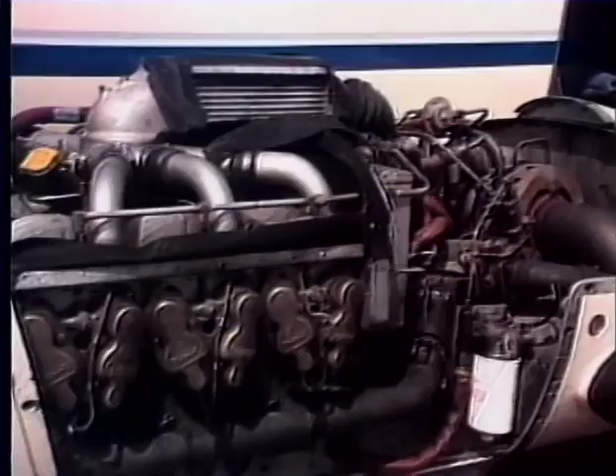What you and I will talk about is the theory and construction of aircraft engines. We're going to lead off by talking about reciprocating engines, you know, these with pistons that fly all around and shake and rattle. We'll get into turbines later on.

All right, let's talk about the 5 events in a 4-stroke cycle engine. Now wait a minute, what in Sam Hill is a 4-stroke cycle engine? It's just a 4-cycle engine. That's the FAA's fancy terminology for a 4-cycle engine, they call it a 4-stroke cycle engine. And yes, you heard me right, I said, what are the 5 events in a 4-stroke cycle engine?

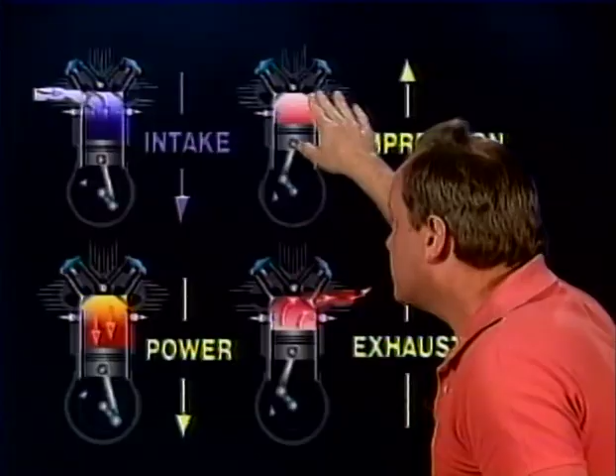Well, here's the way the FAA does it. We all know how an engine works. The intake valve opens, the piston goes down, it sucks in the fuel-air mixture, and that's called the intake stroke. Then both valves close, the piston goes back up and squeezes the fuel-air mixture. That's called the compression stroke.

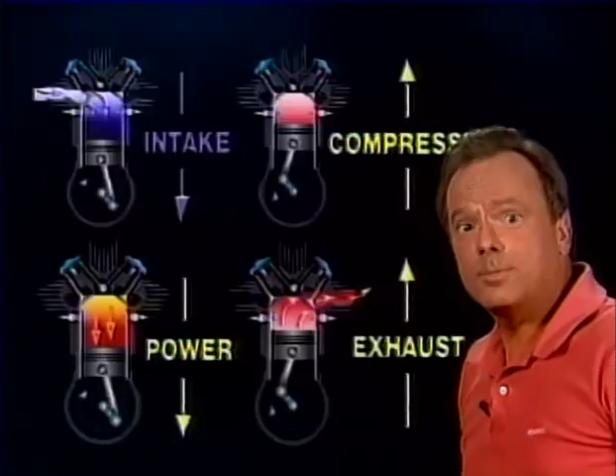And here's the 5th event: the spark plug fires, you have ignition. And with both valves closed, the fuel-air mixture burns and expands, shoving the piston back down, and that's called the power stroke. Then the exhaust valve opens, the piston goes up and shoves the exhaust out the exhaust system, and that's called the exhaust stroke. So the 5 events in a 4-stroke cycle engine are intake, compression, ignition, power, and exhaust.

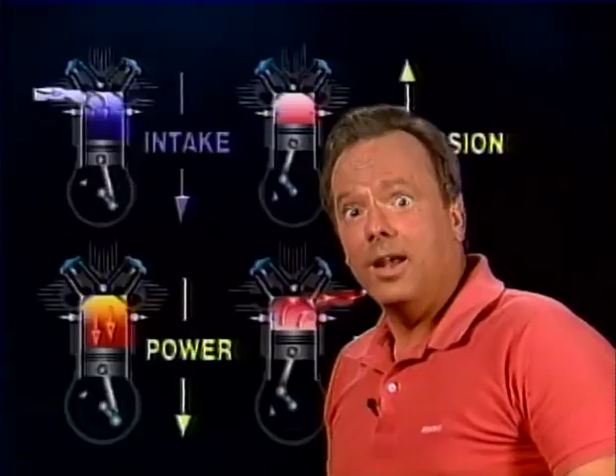Now, I said that in class one time, and some guy said to me, 'Hold it, wait a minute, that's way too doggone complicated.' I said, complicated? What are you talking about? What's so complicated? All I said is, any internal combustion engine is simply a matter of intake, compression, ignition, power, and exhaust. This is way too complicated.

All right, what's less complicated, I said. He says, well, everybody ought to know, especially you ought to know: any internal combustion engine is simply a matter of suck, squeeze, fire, bang, and blow. All right, you can make out of that whatever you want. That is not official FAA terminology, but it does help me to remember it. As far as the FAA is concerned, any internal combustion engine is simply a matter of intake, compression, fire or ignition, power, and exhaust.

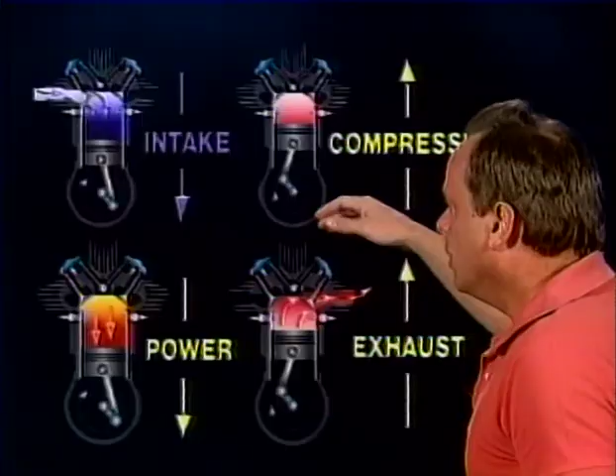Now, they'll ask you some questions about a 4-stroke cycle engine. They're going to say, on the compression stroke, would the intake valve be open or closed? Well, if you expect to get any compression at all, it's got to be closed. So the intake valve closes on the compression stroke.

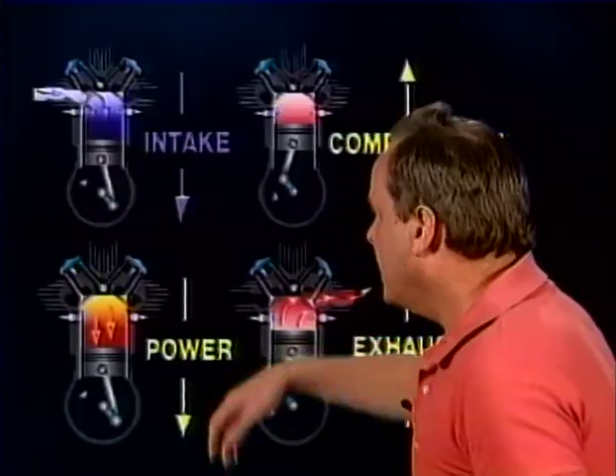And they're going to say, all right, let's assume the exhaust valve of a 4-stroke cycle engine is closed, and the intake valve is just closing. What stroke are you on? Well, once again, if both valves are closed, that's the compression stroke, because the intake valve is just closing, and it does that on the compression stroke.

Now, here's a couple of concepts that are really going to be useful to you in understanding some questions later on for the written exam. These 2 concepts, you probably already know them, are top dead center and bottom dead center. They're going to be helpful in determining valve overlap and setting timing, and answering questions on a test more than anything else. All right, let's take a look at it.

Top dead center is when the piston has gone on its upward path, stops, and reverses itself and starts back down again. Top dead center is when the piston reverses itself right there, and by the way, it's also when the piston is furthest away from the crankshaft. What's bottom dead center? Well, it's when the piston is going down, gets to the bottom of its stroke, and then reverses itself. At that point, the piston is as close to the crankshaft as it's going to be. That is top dead center and bottom dead center.

We're going to talk about those concepts later on. Now, another concept we want to talk about is valve overlap. When I explained intake, compression, power, and exhaust, I implied that these valves open and close at top dead center and bottom dead center, but they don't. In order to help the engine breathe a little better, scavenge the exhaust out of the engine and so on, these valves open slightly off the top and bottom dead center. For instance, let's take a look at it.

First of all, at the end of the exhaust stroke, very often you'll find that when the piston is going back up on the exhaust stroke, the intake valve will open 15 degrees before top center. The reason for that is, as the new intake, the fuel-air mixture, comes into the engine, it helps shove out the burnt mixture out the exhaust system.

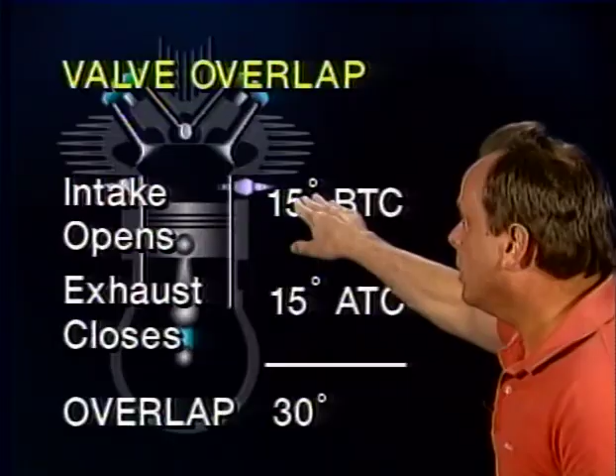So the intake valve actually opens at the end of the exhaust stroke, 15 degrees before top dead center. Both valves are open for that 15 degrees, and then the exhaust valve stays open until the piston starts back down 15 degrees after top dead center, because you're still having some of the intake come in and shove the exhaust back out. So there's actually 30 degrees of valve overlap, as you finish the exhaust stroke and start the intake stroke. During that time, both valves are open for 30 degrees, and that's called valve overlap.

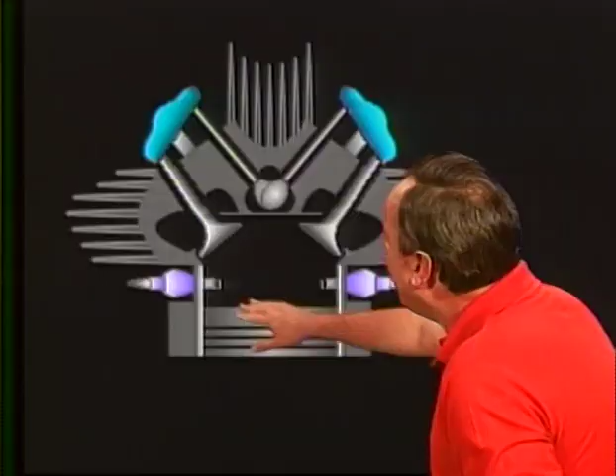Now, they're going to ask you a question about this on the test, and the question is: why do you have this valve overlap? Why do you have two valves open at the same time? And what is the importance of proper valve timing? Why is that so important? There are actually two reasons you have valve overlap, and two reasons proper valve timing is so important.

These two reasons are that they help obtain best volumetric efficiency. You might say, well, what is volumetric efficiency? That's the ratio of the charge you're putting into the cylinder to the displacement of the cylinder. If you're getting a lot of charge in the cylinder, you have very good volumetric efficiency. The other reason proper valve timing and overlap is important is that you get lower cylinder operating temperatures.

Now, these are the correct answers to this question on the test. They also give you a couple of false answers that don't quite make sense. They're actually correct statements, but they're not complete answers.

For instance, one false answer they give you is that you want to achieve the best possible fuel-air charge, and that's the reason you have proper valve timing and overlap. Well, getting the best charge is one element of volumetric efficiency, and it's actually a function of how long you have the intake valve open. That's not the correct answer. The correct answer is to obtain best volumetric efficiency.

Another answer they give you that's not totally complete is that the reason you have valve overlap is you get better scavenging of exhaust gas. Well, the most important thing for good scavenging of exhaust gas is opening the exhaust valve before you get to bottom dead center, which lets the exhaust start out early on the power stroke. That's how you get good exhaust gas scavenging, but that's not the correct answer to the test.

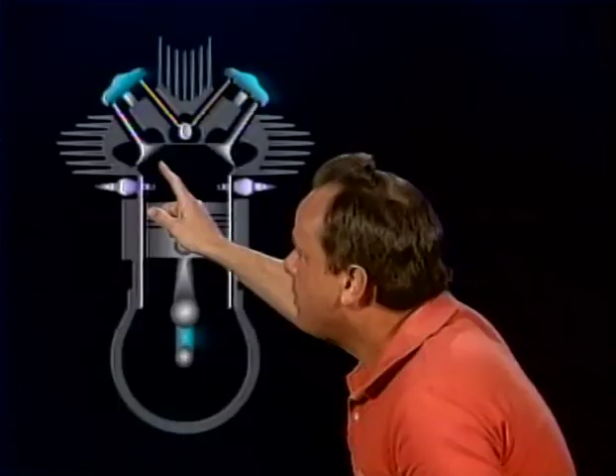Now, what would happen if the intake valve opened too early? Instead of 15 degrees before top center on the exhaust stroke, let's assume it opened, say, 30 degrees. What would happen? You could get what they call backfiring through the intake, because if the intake valve opens too early while the piston's going up on the exhaust stroke, a lot of hot exhaust goes into the intake, which can ignite the intake mixture, causing a backfire through the intake. So backfiring would occur, to use the FAA's words, if the intake valve opens too early, because the exhaust gases would flow into the intake manifold and ignite the incoming fuel-air mixture.

So valve overlap promotes better scavenging and cooling characteristics of the engine. By the way, don't try to memorize these valve overlap numbers exactly, as they vary. Sometimes the exhaust valve closes some 10, maybe 15 degrees after top dead center. Once again, it varies.

So let's take a look at how the valves might operate on all four strokes of a reciprocating engine. Here's a typical engine, and we're starting off with the intake stroke, with the piston going down.

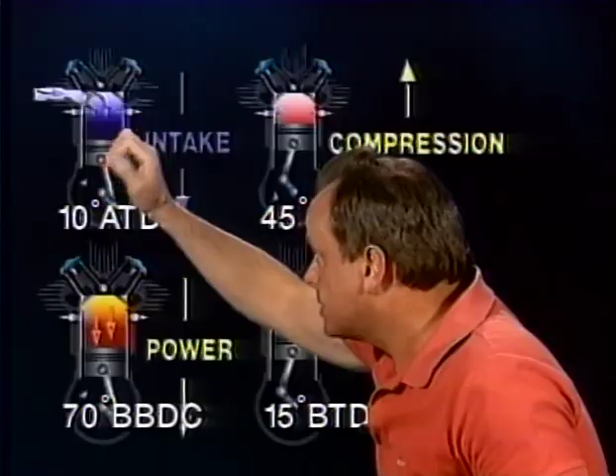On the intake stroke, the exhaust valve doesn't close until about 10 degrees after top dead center, because exhaust is still going out even though the piston's starting back down. So the exhaust valve closes on the intake stroke 10 degrees after top dead center.

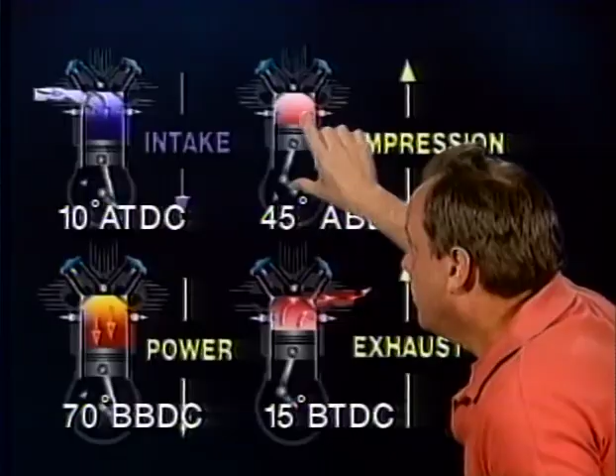Now, we've got the piston going down, the intake coming into the engine, and on the compression stroke, the intake valve stays open and doesn't close until 45 degrees after bottom dead center. The reason is, even though the piston's starting back up, the intake valve is still open because

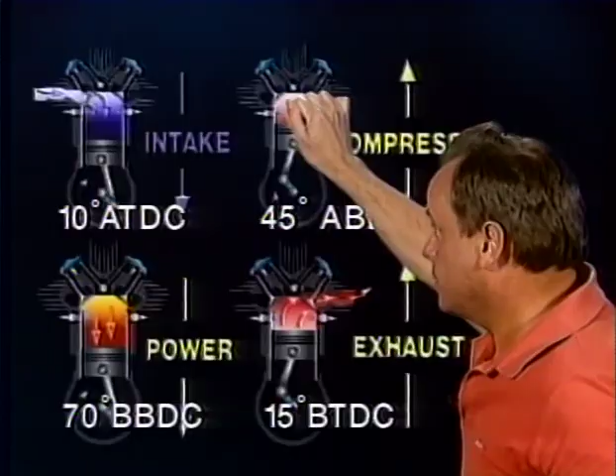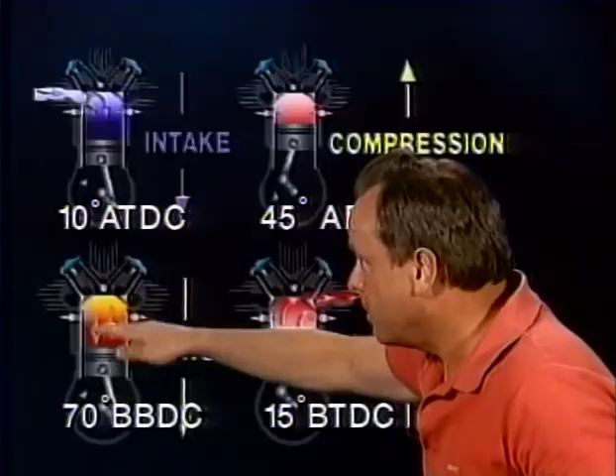You think of both valves being closed for the entire power stroke, but they're not, because at 70 degrees before bottom dead center, the exhaust valve opens and the burnt fuel air mixture starts going out the exhaust system, because in the first part of the travel, almost all of the energy has been taken out of that power stroke at that point.

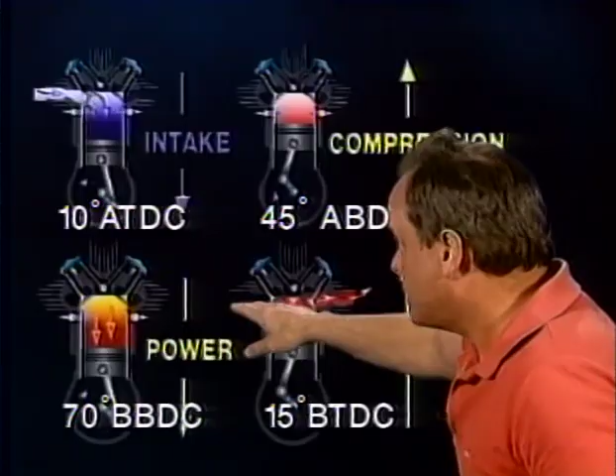So now we're using the last little bit to help the exhaust go out, to help cool the engine finally. And now you have the piston going back up on the exhaust stroke, and about 15 degrees before top dead center, the intake valve opens, to help scavenge the engine, to help the intake come in and still replace some of the exhaust there.

So here's how the valves might operate in this particular case. Now, here's the question they're going to ask you about this on the FAA written exam.

They're going to say, given this particular situation, how many degrees of crankshaft rotation are both valves seated at the same time? Now, earlier we talked about valves being open, but now we're talking about how many degrees of crankshaft rotation are both valves seated. Well, let's see if you and I can figure it out. Let's take a look at the numbers.

First of all, it's not correct, but we think of during the power and compression strokes, both valves are closed. So let's start off that way. Let's assume that were the case, and then we'll make some deductions and change it from there. Think of on the power stroke, both valves being closed.

That's 180 degrees of rotation of the crankshaft. And on the compression stroke, both valves being closed, that's 180 degrees also. So on the compression and power strokes, that's 360 degrees.

But we know that both valves aren't closed. For instance, the intake valve closes 45 degrees after bottom dead center, not at bottom dead center, so you can subtract 45 degrees of crankshaft rotation there. And we know that the exhaust valve opens on the power stroke 70 degrees before bottom dead center.

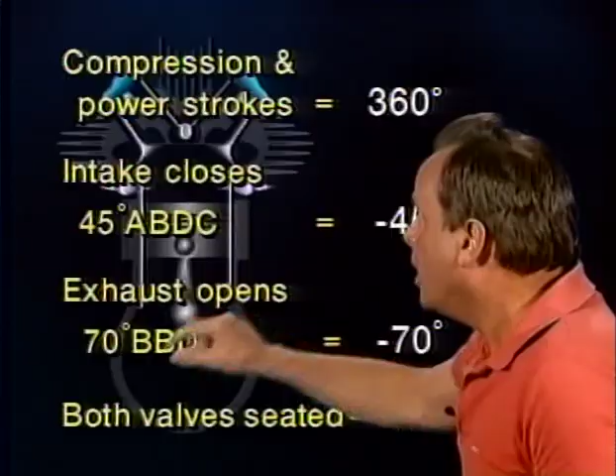So instead of both valves being closed for 360 degrees on those two strokes, they are closed for 360 degrees minus 45 degrees minus 70 degrees, and both valves are closed for 245 degrees. Those are the kinds of questions they're going to ask you about valve operation and also about valve overlap. You do not have to memorize these numbers. All you have to do is, given these numbers, figure out that answer, and that's all there is to it.

Now, as you know, the pistons in an engine don't fire in 1, 2, 3, 4, 5, 6, 7, 8, 9 order. So let's assume you had a 9-cylinder engine. They don't fire in that order. What they do is fire in a firing order that skips around the engine a little bit.

Now the question is, why do you have a firing order that does that? The reason is that it helps eliminate vibration and helps balance the engine. They're going to ask you particularly, here's the way the question goes on the FAA exam: what is the firing order on an inline, V-type, or opposed engine designed to do?

And we're talking about a reciprocating engine. And the answer is the firing order is designed to eliminate vibration to the extent that's possible and to provide for balance of the engine. Now, we're going to solve a problem in just a minute.

In order to solve that problem, you need to know the firing order in a 9-cylinder radial engine. The cylinders are numbered so that number 1 is at the top, and as you're sitting in the aircraft, 2, 3, 4, 5 go clockwise as you go around. That's how the cylinders are numbered. How do they fire? What's the firing order?

Let's take a look at the firing order in a 9-cylinder radial engine, and it's really pretty easy. First all of the odd cylinders fire: 1, 3, 5, 7, 9. Then you go back and all the even cylinders fire: 2, 4, 6, 8. That's the firing order in a 9-cylinder engine. 1, 3, 5, 7, 9, 2, 4, 6, 8.

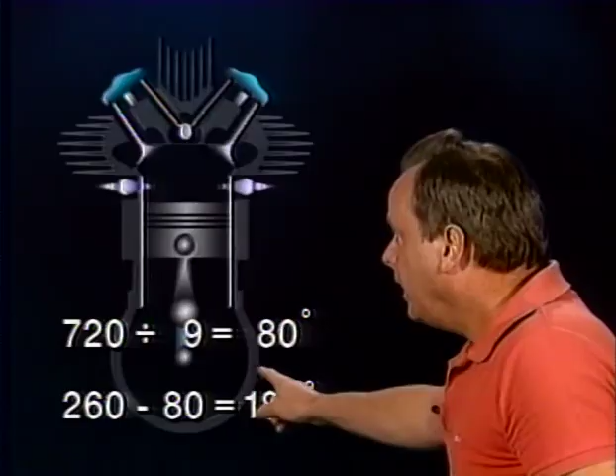Now, what is the 180 degree point? The piston is at the bottom of the cylinder on the power stroke. At the bottom of the cylinder on the power stroke, what is the position of the exhaust valve? The answer is the exhaust valve is open, because the exhaust valve normally opens somewhere around 70 degrees before bottom dead center. You already knew that, didn't you?

So if you don't get any compression in this cylinder, is that normal? The answer is absolutely normal. It'd be very hard to get compression because the exhaust valve is open. These are the kinds of questions they're going to ask you, and it's simply a little bit of mathematics. You need to know that the number 3 cylinder is the second one in the firing order of a 9-cylinder engine, so it's 80 degrees behind the number 1 cylinder. If you rotated the engine 260 degrees, that number 3 cylinder is at the 180 degree point, which you know is the bottom of the power stroke.

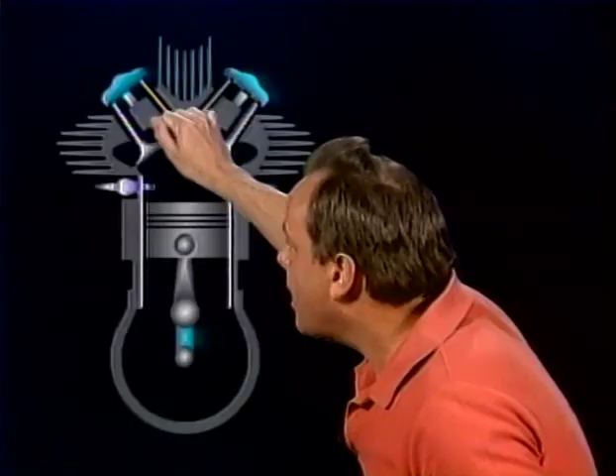See, nothing to it. So, how are engines timed? Well, the ignition is also timed. The whole idea is if the ignition and valves are adjusted properly and the fuel-air ratio is proper, the combustion process should be completed just after top dead center at the beginning of the power stroke. For that to happen, the fuel-air mixture is generally ignited before the piston gets to the top of the compression stroke. How much before? Generally about 28 degrees.

The fuel-air mixture on a compression stroke is normally ignited 28 degrees before top dead center. So let's assume that ignition occurs on an engine at around 28 degrees before top dead center on a certain 4-stroke engine, and let's assume that the intake valve opens.

Let's assume you have compression going up 28 degrees before top dead center, the spark plug fires, the fuel-air mixture burns, the piston continues up, and then at top dead center the piston reverses itself, and now you have the power stroke. You complete the power stroke, and then you have the exhaust stroke.

Let's assume on the exhaust stroke the intake valve opens, as you know it does, 15 degrees before top center. Now, the question they're going to ask you is: how many degrees will this crankshaft travel after ignition before the piston comes back around and the intake valve opens on the exhaust stroke, or before the intake valve opens again? Let's take a look at the numbers.

First, we have the compression stroke, and before you get to top center, ignition occurs 28 degrees before top center. So you have that 28 degrees first, and then you get to top dead center, and then you start the power stroke. You have 180 degrees of power stroke, and you'd have 180 degrees of exhaust stroke. So you have 360 degrees there, but hold the phone—the exhaust stroke has the intake valve opening 15 degrees before top center, so you'd have to subtract that 15 degrees, and the answer to the question is 373 degrees.

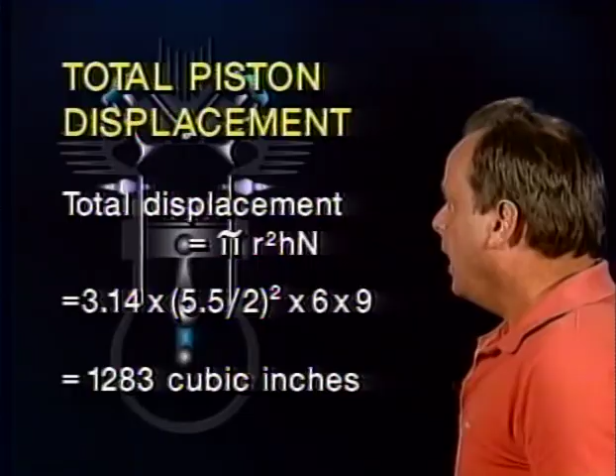But let's put some numbers in this. Let's assume you have a 9-cylinder engine, and let's assume that engine has a bore of 5.5 inches. Now, wait a minute—we don't need the bore, we need the radius.

The bore is the total diameter of the piston, and we want half of that. So take 5.5 divided by 2. When you get the answer, multiply it times itself, and that's the square - that's radius squared right there. If you take 5.5 divided by 2 and multiply it by itself, that's radius squared.

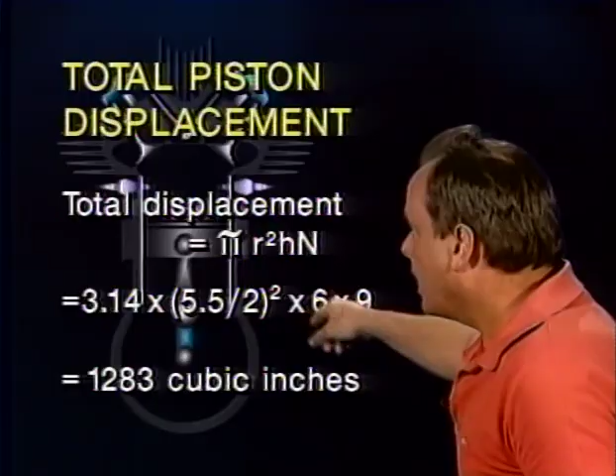Now, the total displacement is what we want to know. It's a 9-cylinder engine, has a bore of 5.5, and let's assume it has a stroke of 6 inches - let's assume they give you all of that. What you would do is take pi, 3.14, take the diameter of the piston, which is the bore, and divide it by 2, then multiply that answer by itself, and that gives you the radius squared. Multiply it times 6, because that is the stroke of the engine. Multiply that times 9, because it has 9 cylinders in the engine, and you have figured out the displacement of that particular engine. If you use your electronic calculator and do all this, you find out it's 1,283 cubic inches. And that's about an average displacement for a 9-cylinder engine.

Now let's talk about another concept they want you to know about: the compression ratio of a cylinder. How do you find the compression ratio of a cylinder? You take the total volume of the cylinder when the piston is at the bottom - the cylinder has a big volume to it - and you divide that by the volume of the cylinder when the piston's at the top of the cylinder, and that gives you the compression ratio of that particular engine. Let's figure out the compression ratio of an engine. First, let's assume when the cylinder's at the bottom, the volume is 70, and when the cylinder's at the top, the volume is 10. How do you find the compression ratio? All you have to do is divide. What's the compression ratio of this engine? 7:1. Fantastic.

Now, why do you have an engine with lots of cylinders in it? The P-51 Mustang had that beautiful Merlin engine, sounds like silk, has 12 cylinders. Why so many cylinders? Well, with a greater number of cylinders, the smoothness of operation of an engine increases. And why? Because the power impulses are spaced closer together. I'm beginning to learn to talk just like the FAA here.

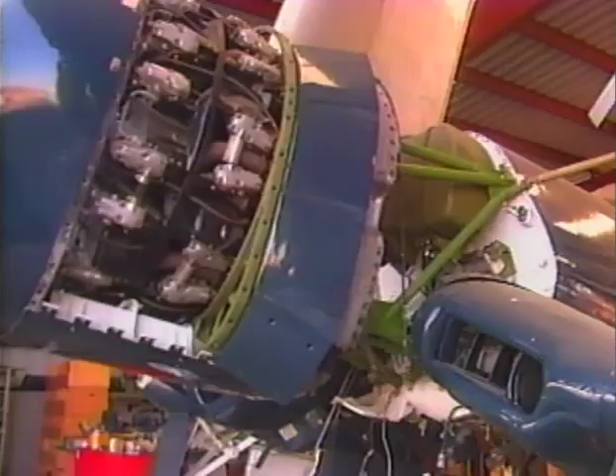How many times does a crankshaft have to rotate for each cylinder to be fired in an engine? The answer is if it's what the FAA calls a 4-stroke cycle engine, the crankshaft must make 2 complete rotations for each cylinder to fire. So the question is, if you have a 4-stroke cycle engine and that engine is to be fired 200 times a minute, how many times a minute must the crankshaft rotate? The answer would be 400 times a minute.

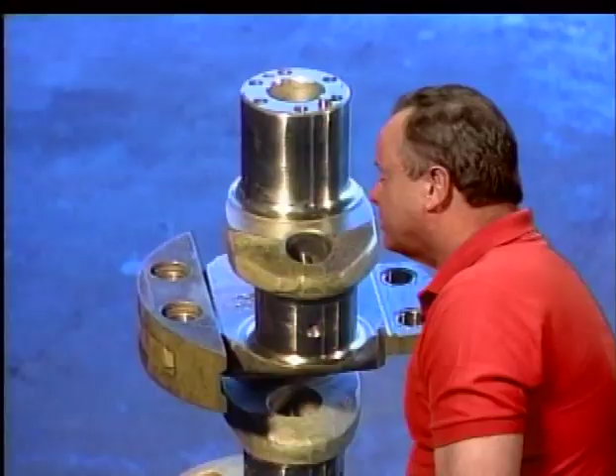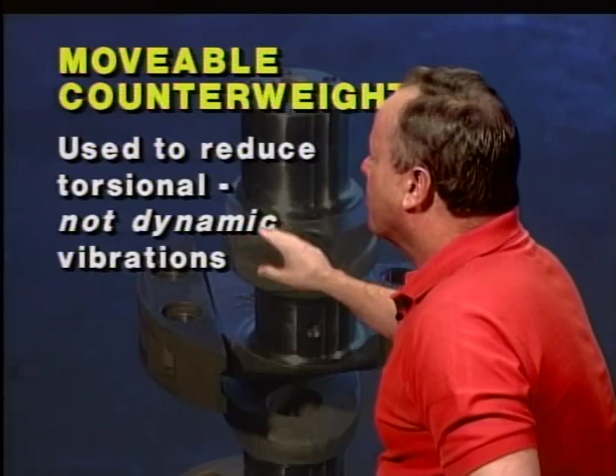Now let's take a good look at a crankshaft, and one of the things the FAA wants you to know about crankshafts is that there's movable counterweights in here. These are weights that can move around, called movable counterweights. They're going to ask you on a test, what are these movable counterweights used for? The answer is these movable counterweights are used to reduce torsional vibrations - that's twisting vibrations on the crankshaft. If you put a big rod on the table and a great big flywheel at each end, you could get these flywheels going back and forth like this, and that would be torsional vibration. That's a bad deal in a crankshaft. It's a type of dynamic vibration, but it's not just any dynamic vibrations - they're looking for torsional vibrations specifically. That is a type of dynamic vibrations, but the thing you need to remember is the purpose of these movable counterweights is to reduce torsional vibrations, not just dynamic vibrations, because they're specifically looking for torsional vibrations.

Now let's talk about cylinders, and here is a cylinder right here inside an engine like so. And by the way, the FAA wants you to know sometimes you have a choke or taper ground cylinder, and the whole cylinder itself is bored with a slight taper or choke, kind of like a shotgun can be in sometimes.

So when the engine is hot, the narrower taper here near the cylinder head expands, and therefore it becomes a straight cylinder rather than a tapered cylinder at that point when the engine is hot. That's why they grind cylinders sometimes with what is called a choked or tapered grind.

Now let's take a look at the cylinder walls. The cylinder walls of an engine get a tremendous amount of wear, and we're going to ask you, where do they get the greatest amount of wear? The cylinder walls get the greatest amount of wear near the top of the cylinder, and that's where the temperatures and pressures are the greatest. So the greatest wear on the cylinder is near the top.

These are FAA test questions coming at you hard and fast here.

What do you do about the wear that these cylinders get? Sometimes they get a tremendous amount of wear. One of the things you can do is harden the cylinders with a process called nitriding. Nitriding is a process of case hardening a steel alloy cylinder barrel with the inner surface hardened to resist wear of the piston and piston rings which bear against it. So they've hardened this inner surface here.

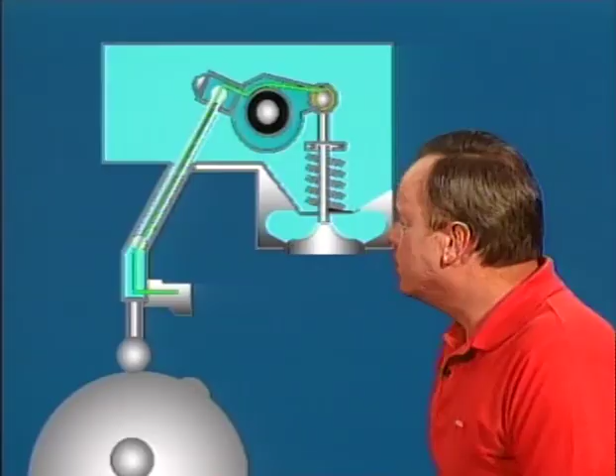They're going to ask you a lot of questions about hydraulic valve lifters and mechanical valve lifters. This is the valve lifter, also called a tappet, and it's the link between the cam itself and the push rod. In older engines these used to be mechanical, and when the engine got hot and cold, the clearances would change, so you had to adjust the clearance for when the engine was running hot. That was called adjusting the valves, adjusting the clearance between the tappet or valve lifter and the push rod. But today, on more modern engines, we use hydraulic valve lifters or hydraulic tappets, and you get rid of that problem.

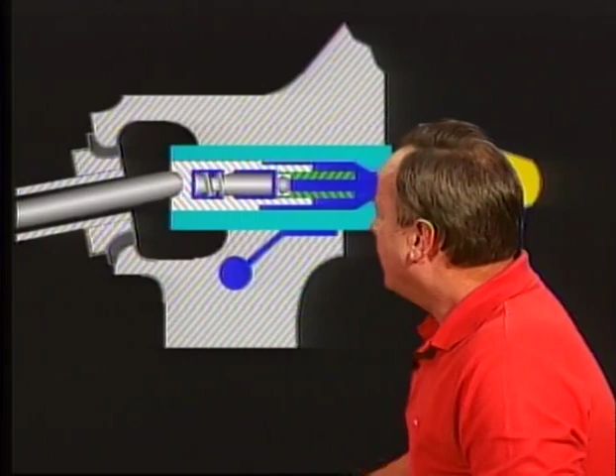Let's take a look at how a hydraulic valve lifter works. Here we have a hydraulic valve lifter, and here's the cam. The lobe comes around and pushes against the tappet, and the tappet shoves over in this direction, and here's the push rod, and it pushes the push rod over. The deal on a hydraulic valve lifter is that it fills with hydraulic fluid. There's a spring and a check valve, and the mechanism works such that the hydraulic fluid - engine oil in this case - always fills up the space where there would be play. So there is no clearance on a hydraulic valve lifter.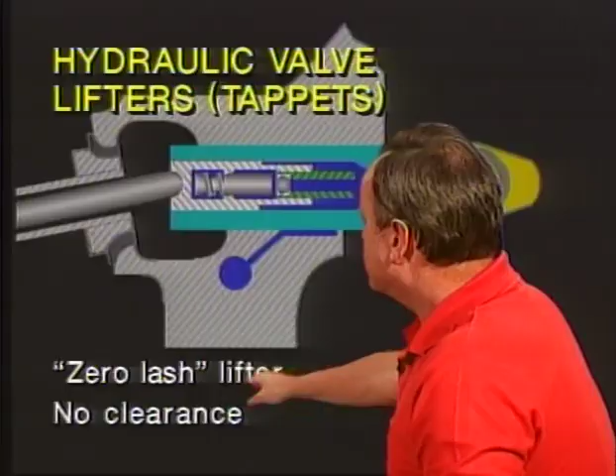Therefore this is called a zero lash lifter. Now they're going to ask you about these zero lash lifters - that's a hydraulic valve lifter, or tappet as they call it.

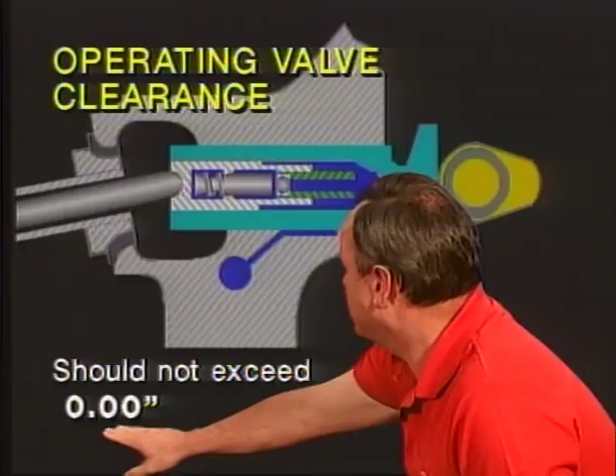They're going to ask you, during normal operation of an overhead valve engine using a hydraulic valve lifter, how much clearance would be in the valve operating mechanism? The answer is there is no clearance. It should not exceed 0.000, none at all, after you've reached the minimum inlet oil temperature and cylinder head temperatures for takeoff. So there'd be no clearance at all.

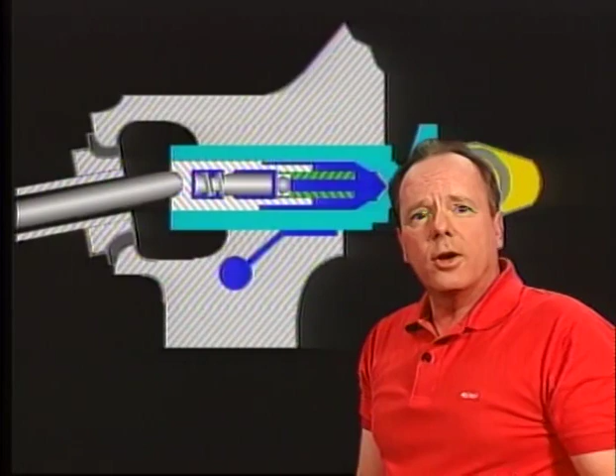Now let's assume that this piston assembly inside this hydraulic lifter has gone all the way to one extreme. Obviously you need to adjust the clearance, but you can't do it directly - how do you do it? The only way you can adjust the clearance in this case is to change the push rod, because you cannot adjust the hydraulic valve lifter. If things aren't working out right and you need to change your clearances, you replace your push rods - just get a different length push rod.

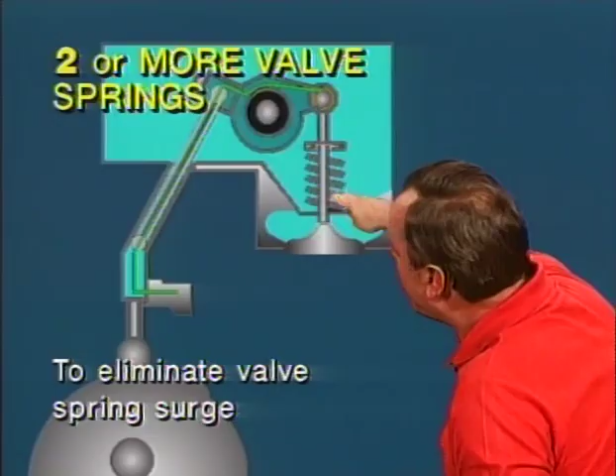Now let's take a look at the valve assembly one more time, and one of the things we want to look at is the springs. Sometimes you'll notice each valve has more than one spring, maybe two or more. Why would the valve have two or more springs? The answer is to eliminate valve spring surge. When you have a spring that can oscillate, it'll have a resonant frequency, and sometimes the engine can run at the resonant frequency of that spring. In that case the spring will float, the valve will float, and it won't work properly. To eliminate that, you put in two or more springs, each with a different resonant frequency, and you hope to eliminate valve spring surge.

Now, sometimes these valves in aviation engines are not solid valves - they are filled with sodium. This is particularly true on exhaust valves. Why would that be? The answer is to dissipate heat well, because exhaust valves particularly have a tremendous amount of heat going by them.

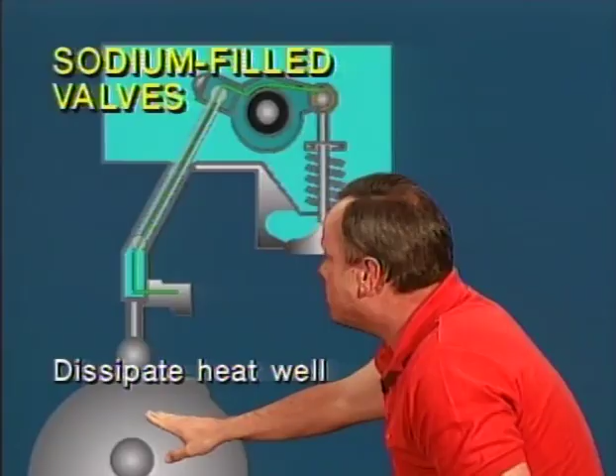You need to be cooled down, and they fill these exhaust valves with sodium to dissipate heat well. Now, let's assume you're flying an airplane with an engine that has valves like this—most do if you're flying a piston engine aircraft—and you're having a bad day. There's a lot of wear and tear with the rocker arm pushing against the end of the valve, and let's assume the end of the valve stem breaks off. If you're having a bad day, the valve could fall inside the cylinder, the piston going up and down beats a hole in the piston, you lose your engine oil, the engine quits, and that could cause an accident. You've had a bad day.

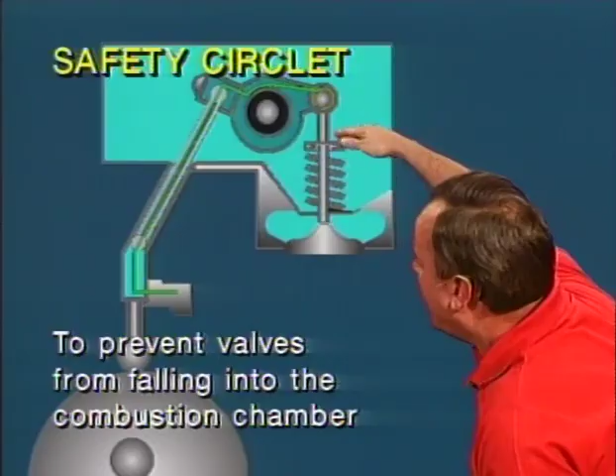Now, if you want to eliminate or minimize the chance of that happening, you can install what is known as a little safety circlet near the top of the valve spring. That safety circlet will prevent the valve from falling into the combustion chamber should the tip of the valve break off, thereby preventing that scenario from happening. So that is what is known, for obvious reasons, as a safety circlet.

All right, let's talk about propellers and propeller reduction gears. First, the propeller type certificate data sheets contain a table that lists the engines to which a given propeller is adaptable. Translating that into English, if you want to find out if you can put a certain propeller on a certain engine, you go to the propeller type certificate data sheets. That's where you go.

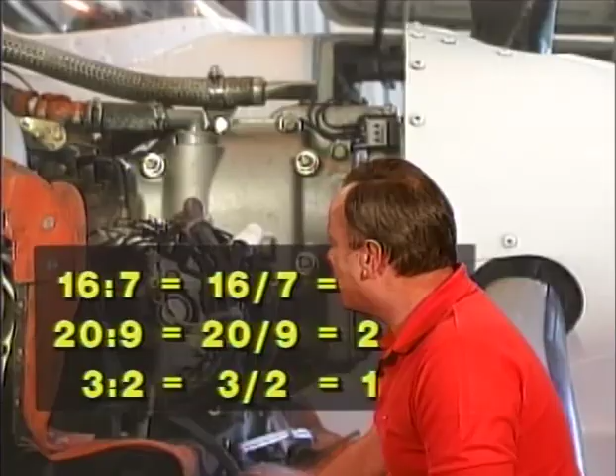Now, they're going to ask you a question about this on the test. They'll give you several gear ratios and ask which one gives you the highest propeller RPM. Well, the whole idea of a gear reduction ratio is to reduce the propeller RPM, so they're going to ask which one gives you the highest propeller RPM—it's the one with the least reduction. Here are the ratios: 16 to 7, 20 to 9, and 3 to 2. To answer this, just take out your electronic calculator and divide 16 by 7, 20 by 9, and 3 by 2, and you get reduction ratios of 2.29, 2.22, and 1.5. Remember, the question was which one gives you the highest propeller RPM—it's the one with the least reduction ratio, and that comes out to 1.5 in this case.

The next thing we want to talk about is dynafocal mounts. Dynafocal mounts are designed so that you take the stress axes and extend them, and where they intersect will be at the center of gravity of the engine. Basically, this means you're essentially supporting the engine about its center of gravity, or the center of its vibrating mass. They call that the focal point, and that gives a much smoother operation. So the FAA will ask you a question about this—first, they're going to ask what is the purpose of dynamic suspension.

The answer is to isolate normal power plant vibrations from the aircraft structure.

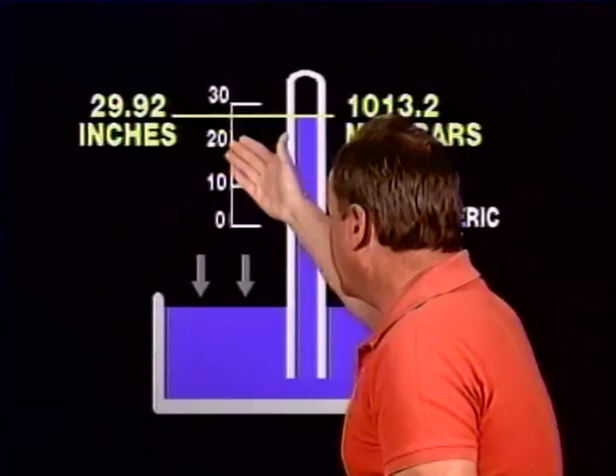Let's wrap up piston engines by talking about a few miscellaneous things the FAA wants you to know. As a mechanic, you ought to know standard sea level pressure in inches of mercury is 29.92. You don't need to worry about millibars of pressure, just 29.92 inches of mercury. Also, standard sea level temperature is 59 degrees Fahrenheit. You don't need to worry about Celsius, just 59 degrees Fahrenheit.

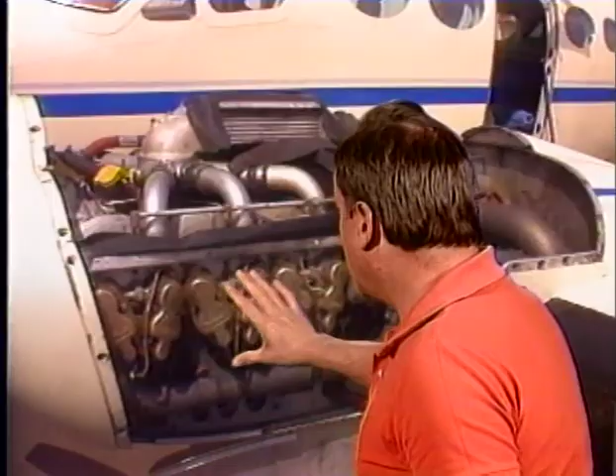Now, if you want to install this engine on an airplane with a standard airworthiness certificate, what do you have to have? The FAA says each power plant must have what is known as a type certificate. So if you want to install an engine on an aircraft with a standard airworthiness certificate, the answer is a type certificate.

Now, they're going to ask you on the test what critical altitude is. Critical altitude is the highest altitude at which any engine, including a turbocharged engine, will maintain sea level pressure in the manifold, so it can get sea level rated power. On a normally aspirated engine, that critical altitude would be sea level - as soon as you leave sea level, the engine begins to run out of power. But on a turbocharged engine, the critical altitude could be a lot higher.

What is horsepower? The horsepower developed inside the cylinders of an engine is known as indicated horsepower. But what's the horsepower delivered to the propeller of an aircraft? That is known as brake horsepower, the actual power delivered to the propeller. So inside the cylinders, indicated horsepower; delivered to the propeller, brake horsepower.

Now here's a question: does increased water vapor in the incoming air to a reciprocating engine increase or decrease engine power at a constant RPM or manifold pressure? The answer is increased water vapor decreases engine horsepower, because water vapor is less dense than air and decreases the density of the air the engine is breathing, also displacing oxygen. So increased water vapor normally results in decreased engine power at a constant RPM and manifold pressure.

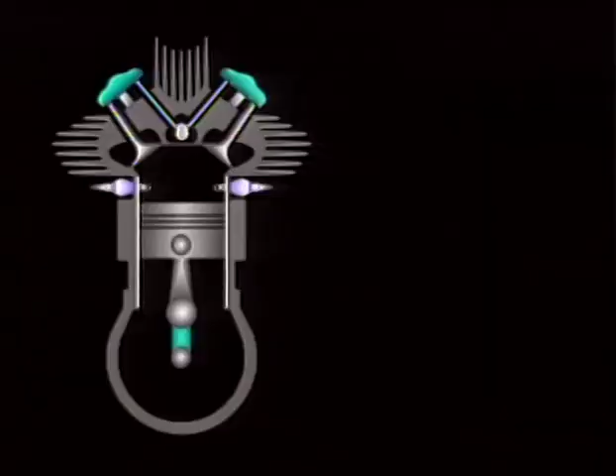Now, we talked earlier about volumetric efficiency, which is the ratio of the charge getting into the cylinder to the cylinder's displacement. When that piston goes down and leaves an area, that's the displacement, and it's how much charge you're getting in there compared to the displacement of that cylinder. When they talk about that charge, they mean standard pressure and temperature conditions - how many molecules you're really getting in there compared to what you'd get under standard conditions.

That's volumetric efficiency. Now, they'll ask on a test what things would decrease volumetric efficiency. Part throttle operation would be one thing, because engines tend to operate more efficiently at higher power. Improper valve timing will also decrease your volumetric efficiency. Also, if there's a sharp bend in the induction system of the engine, that impedes the flow of air into the cylinder and decreases volumetric efficiency. And high carburetor air temperatures mean the air going into the cylinder is less dense, so you're getting fewer molecules of charge into the cylinder, decreasing volumetric efficiency. So these things all decrease volumetric efficiency: part throttle operation, improper valve timing, a sharp bend in the induction system, and high carburetor air temperatures.

Now, let's assume you build an engine and you're running it. The question they're going to ask you on the test is, would it ever be possible to exceed 100% volumetric efficiency?

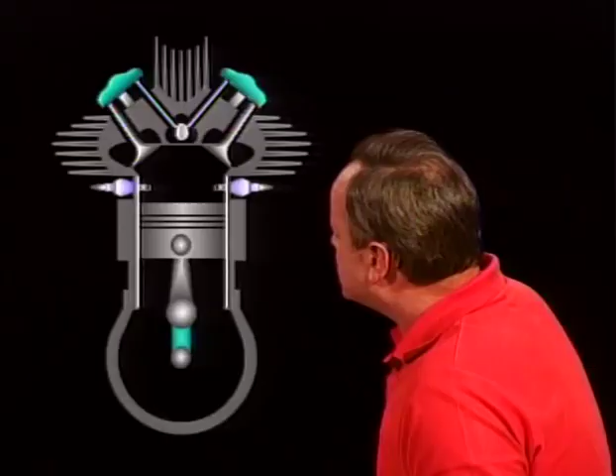Well, yeah, because it's based on standard conditions, and if you could somehow stuff the air into the cylinder, you could get more than 100% volumetric efficiency. How can you stuff the air in there? You can do it by the use of a supercharger and actually stuff the air in the cylinder, and you get more than 100% volumetric efficiency.

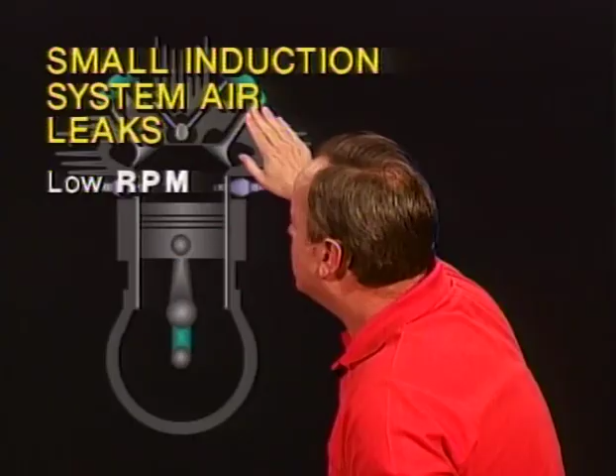Now, let's assume you had a small induction system air leak, and that's going to have a very noticeable effect on the engine. When is it going to bother the engine the most, at high RPM or low RPMs? The answer is the engine is having the hardest time when it's operating at low power, so a small induction system air leak will have the most noticeable effect on the engine at low RPM.

All right, let's talk about these magnificent turbine engines. And these engines really are magnificent. Turbine engines have tremendous amounts of power. They operate remarkably smooth, and they're vibration-free. About the only thing you can really say against a turbine engine is these things are enormously expensive. And I guess that's the way life goes. Anytime something is really, really nice, it's really, really expensive. And it's certainly that way with turbine engines.

Let's talk about how a turbine engine works. Let's take a look at a drawing of a turbine engine. First, you have the air coming in the intake of the engine at the front. Then you have these rotating airfoils that compress the air as it goes through the engine. Notice, you have intake, now compression. This compressed air goes back into the engine, enters the burner cans, gets mixed with fuel, and burns. You have ignition, and then the burnt fuel air mixture expands and jets out the back and turns these rotating airfoils, called turbines, and that creates the power to run the compressors. You have power, and then the air exhausts out the back. So notice you have those same 5 events taking place inside a turbine engine: intake, compression, ignition, power, and exhaust. Now I got it right - that's 5 events right there.

And what do the turbines do? Well, the whole purpose of the turbines is that the air jetting past the turbines rotates these airfoils of the turbines, and the turbines in turn rotate the compressors and make the compressors go.

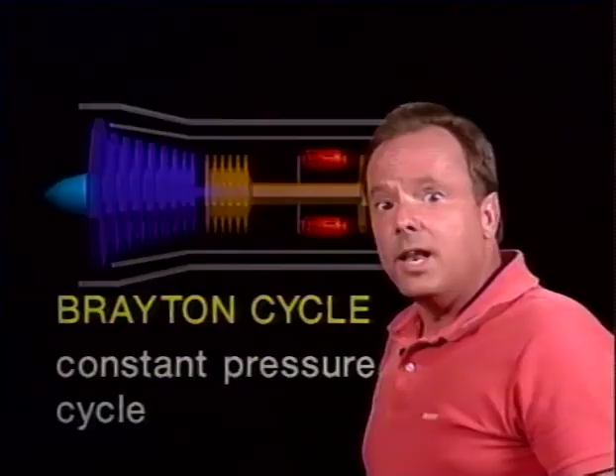Now, we all know the principle in which a turbine engine works, particularly a fan jet. If an engine is a fan jet, the compressor section is connected to a great big fan and some of the air bypasses the inner core of the engine - it's called a fan jet. If you don't have a fan at the front, it's called a turbojet. And a high bypass fan is one which has a lot of air bypassing the inner core of the engine.

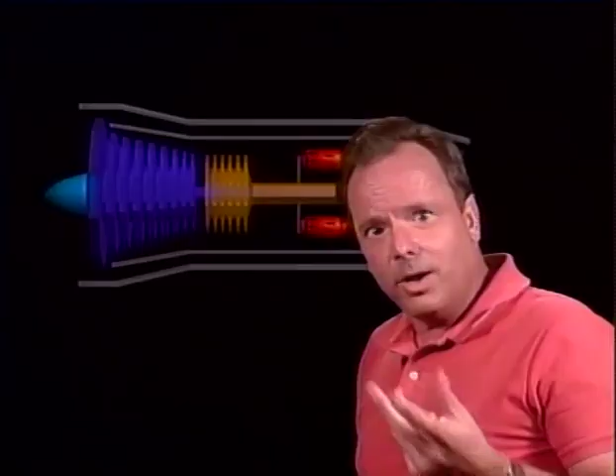Now, we all know the principle upon which these kinds of turbines work is that for every action, there's an equal and opposite reaction. That's called Newton's third law. The air jets out the back, and that's the action which causes the engine to react in the opposite direction. That's Newton's third law. For every action, there's an equal and opposite reaction. Now, we all know that about jet engines. We know that's how it works. We know about Newton's third law.

Therefore, on the FAA written exam, they do not ask you about Newton's third law. They ask you about Newton's first law. That's Newton's first law of motion, generally called the law of inertia. It says that every body persists in a state of rest or motion in a straight line unless acted on by some outside force. That has nothing whatsoever to do with this, and that's why they ask you about that on the FAA written exam. So if they ask you about Newton's first law, don't get confused. Give them this answer: every body persists in a state of rest or in motion in a straight line unless acted on by some outside force. How about that for something confusing?

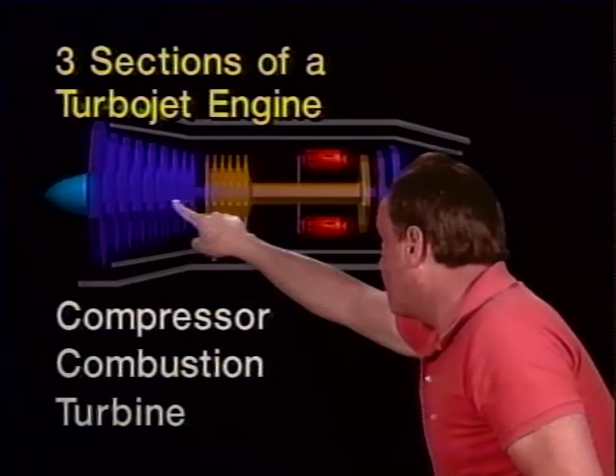Now let's talk about the 3 main sections of a turbojet engine. They are the compressor, which is the rotating airfoils at the front of the engine, combustion, which occurs in the burner cans, and the turbine section, which is the rotating airfoils that the air jets past, rotating to turn the compressors. So the 3 sections are compressor at the front, combustion in the burner cans, and turbine. Those are the 3 sections of a jet engine.

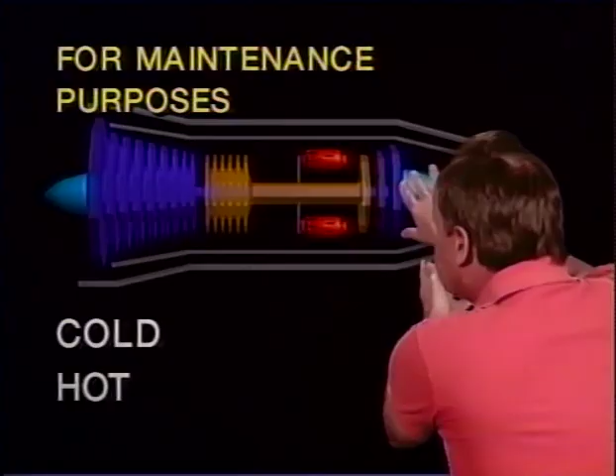For maintenance purposes, a turbine engine is divided into 2 basic sections: the hot section, after fire takes place, and the cold section, before fire takes place. The cold section can still be quite warm because you have a lot of compression taking place, and compression heats up the air.

But it's a lot cooler than after you inject fuel into it and start burning it, then it gets very hot. The cold section includes the engine inlet at the front, the compressor, and very often after the compressor you have a place where the duct widens out, called the diffuser.

Let's talk about Bernoulli's principle for a second. It says the faster a fluid goes, the more it expands and the less pressure is on it. So if you have a narrow spot, the air rushes through and the pressure is less. If you get a wide spot in a duct like a jet engine, the pressure gets greater and the air slows down. That's what the diffuser does after the compressor blades, where some engines widen out.

That's the cold section: the intake, the compressor, and the diffuser. The hot section of the engine includes the combustor, that's the burner cans, the turbine, and the exhaust section on the way back out. Those are the hot sections of the engine.

Another thing you should know about the operating principles of a jet engine is that jet engines operate all the time at 80 to 90% RPM. You can't really fly a jet engine operating at 50% power, because as engine RPM increases in a jet, the power increases exponentially. It increases tremendously, and the thrust you get out of the engine increases exponentially with small increases in RPM at higher RPMs. So the actual in-flight operating range of a jet engine tends to be 80% on up.

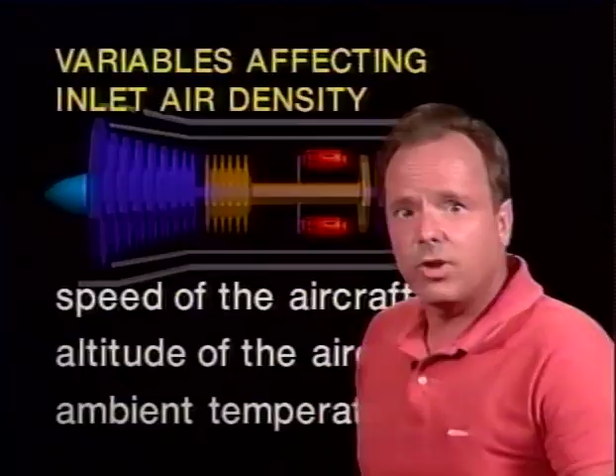Now let's talk about how you measure thrust on a jet engine. If the engine has a great big fan at the front, measuring thrust is pretty simple. All you have to do is measure the fan RPM somehow. If you know the fan RPM, you'll know the thrust the engine's putting out, because that fan is just a great big pump pumping air.

But if the engine doesn't have a great big fan at the front, measuring thrust is a lot more difficult. You can't use the fan, so you have to use something else. Here's an elegant solution: you put an air pressure gauge at the front of the engine to measure the air pressure going in, then put another air pressure gauge at the back, at the exhaust outlet, and take the ratio of those two. That ratio tells you thrust, and it's referred to as engine pressure ratio.

For short, they call that EPR, and EPR is a direct indication of thrust output of the engine. It's the ratio between the exhaust gas pressure and the engine inlet air pressure, and it directly indicates the thrust produced by that engine. On the test, they may give a false answer saying EPR indicates volumetric efficiency. That is not correct. Volumetric efficiency has to do with the piston engine. EPR is engine pressure ratio, and it indicates thrust on a jet engine. It has nothing whatsoever to do with piston engines. You get engine pressure ratio by dividing the turbine outlet pressure at the back by the engine inlet total pressure, and that ratio is a direct indication of gas turbine engine thrust.

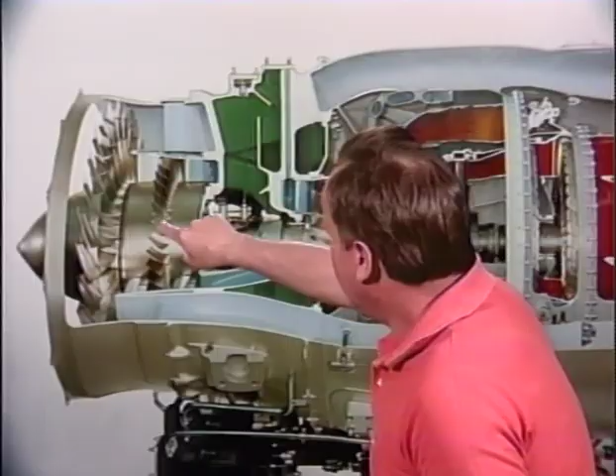Now, an axial compressor is a row of rotating airfoils. You can see right here a row of rotating airfoils that compresses the air along the axle or shaft of the engine. That's why they call it axial. It compresses the air by sending it back along the axle of the engine.

Now the other type of compressor, and the one we're going to spend most time talking about right now, is called a centrifugal compressor. Let's take a closer look at this centrifugal compressor. A centrifugal compressor works by taking the air, and it's basically an impeller, and it slings the air to the outside of the engine, and it compresses it that way. It's almost like a centrifugal pump. It just pumps the air, slings it to the outside, and compresses it.

So there are actually two parts to a centrifugal compressor. One part is the impeller, and you can see the impeller real well right here. It just looks like a pump on a water pump. The other part to the centrifugal compressor is what is called the diffuser. We talked about that earlier. It's an area where the air goes into a wider chamber, slows the air down, and increases the pressure because it slows it down due to Bernoulli's principle. The slower a fluid goes, the more the pressure increases. So you have a diffuser here, which is just a wide area in the duct after the compressor that slows the air down and increases the pressure on it.

So there are two parts to a centrifugal compressor. What are those two parts? Those two parts are the impeller and the diffuser.

Now, what is the advantage of a centrifugal flow compressor? A centrifugal flow compressor normally can do the entire job in only one stage. You notice on other engines there's rows and rows and rows of axial compressors, but on a centrifugal compressor engine, you may have only one or two stages, and that is because there's a very high pressure rise per stage in a centrifugal compressor.

Now there are also two types of centrifugal compressors. This is a single entry compressor. In other words, there's only an impeller on one side, but there are double entry compressors that are centrifugal compressors, and they work by having another impeller identical to it on the other side. Air enters from the other side, and you use both sides of this disc, and put impellers on them and centrifuge the air out with an impeller on both sides. So if you have an impeller on both sides, that's called a double entry centrifugal compressor. This happens to be a single entry centrifugal compressor here. But a double entry centrifugal compressor has vanes on both sides of the impeller.

Now that's enough for centrifugal compressors. Let's take a look at an axial flow compressor. An axial flow compressor is one that has rows and rows and rows of rotating airfoils. The advantage of an axial flow compressor is it's very efficient, high peak efficiency, and you can get a greater pressure ratio. All you have to do is add more and more of these rows of airfoils.

Now let's take a close look at an axial compressor. So here's an axial compressor. Now it's very important that the air striking these compressor blades comes in at the right angle. So in order to ensure that the air does come to the axial compressor at the right angle, sometimes you have what is known as an inlet guide vane assembly.

Here's an example of an inlet guide vane assembly. By the way, it's cut away up here, so you can look down here. The inlet guide vane assembly directs the air so that it strikes the compressor blades at the proper angle. On the test, you need to know the function of the inlet guide vane assembly, which is to direct the air into the first stage rotor blades at the proper angle.

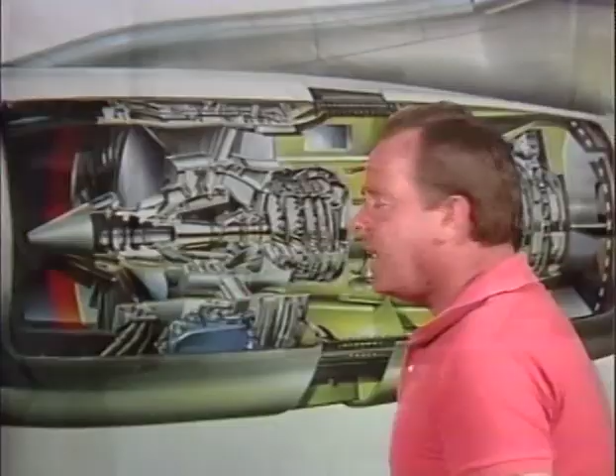Now let's take a look at the engine from a bigger scale again. If you look real close at an axial compressor, you'll notice that in between the rows of rotating airfoils, there's also stationary airfoils in between. They've cut them out, but you'll see down here there's stationary airfoils in between the rows of rotating airfoils.

Well, the rotating airfoils are called rotors, and the stationary airfoils are called stators. The rotating airfoils are designed to move the air back, and the stators are designed to direct the air and shape it to meet the next row of rotating airfoils. So the two basic parts of an axial compressor are rotors, which rotate, and stators, which stay stationary. That's why they call them that.

So it's made up of a series of rotating airfoils, that's an axial compressor, and stationary airfoils, which are called stator vanes. Each row is called a stage. Each one of these series, one rotating section called a rotor and one stationary section called a stator, is called a stage.

So what do the stators do? As I said earlier, they help guide the air going in, and they also act to diffuse the air - that means slow it down and increase the pressure. These stators do a diffusing effect as well, slowing it down and increasing the pressure. So what are they called? Well, the combined rotor and stator combination is called a stage.

Those stators act as diffusers to decrease the velocity of the gas and then increase the pressure, and they prevent swirling and control the direction of the airflow. They're kind of like guide vanes - stators do exactly the same thing. They guide this air around and slow it down and increase the pressure as a result. The idea is that the stator converts velocity energy into pressure energy, the same way a diffuser does: slowing it down decreases the velocity and increases the pressure.

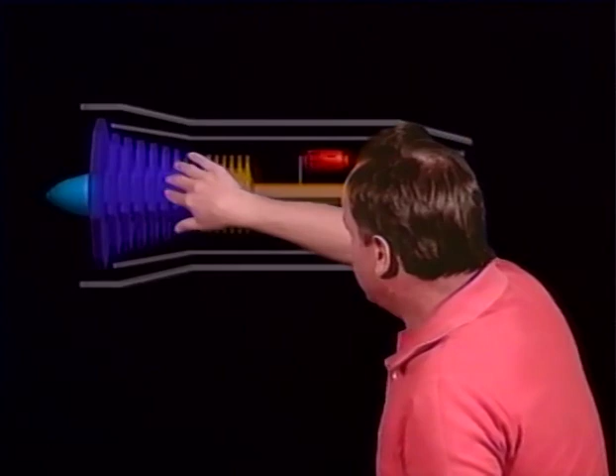This N2 rotor has the air immediately after the burner cans turn this turbine. Since the air is right after the burner cans, that's high-pressure air, so that's called the high-pressure turbine. The N2 compressors are also called the high-pressure compressors, because the air pressure is boosted up a little bit by the earlier compressors, and then these high-pressure compressors boost it up even further. So you have this shaft, this turbine, and this compressor - that's called N2, the high-pressure turbine and high-pressure compressor.

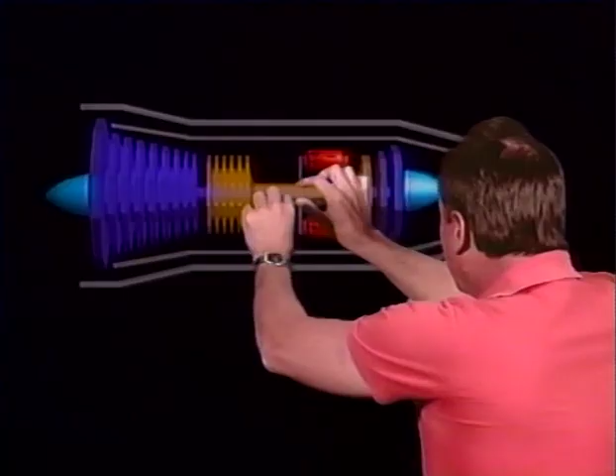All the way inside this shaft, there's another shaft, shown in blue in our drawing, that goes to the low-pressure turbines. They're called low-pressure turbines, since there's two of them, because some of the air pressure has already been extracted by the high-pressure turbines. So these are low-pressure turbines, and this is a low-pressure compressor because it's the first compressor just beginning to compress the air. That shaft goes inside the N2 shaft, and this is called N1.

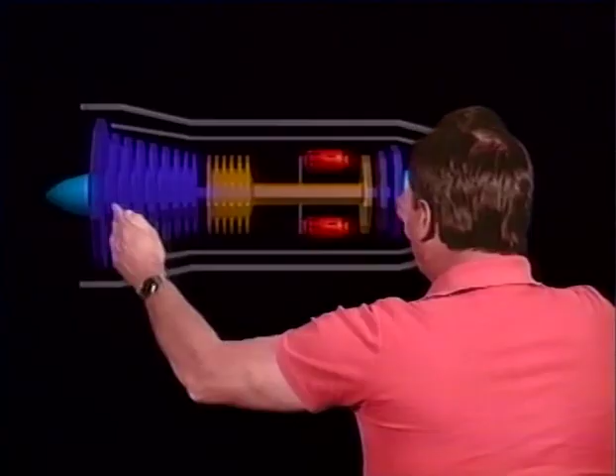Now this has a lot of advantages. First of all, if you're going to start an engine like this, all you have to do is get it rotating. Once it's rotating, the compressors compress the air, you add fuel, and the whole thing lights off. Then when the air starts jetting out the back, it'll also start rotating N1. But to start this engine, you don't have to turn over the entire engine - all you do is turn over N2, and this engine is a little easier to start.

Also, you'll find that these two rotors will rotate at different speeds. So as you go to higher altitudes, N1 seeks its own speed. There's thinner air at higher altitudes, so this N1 compressor might speed up a little bit in the thinner air, and N2 would seek its own speed. That means each turbine and compressor, each rotor, is operating most efficiently.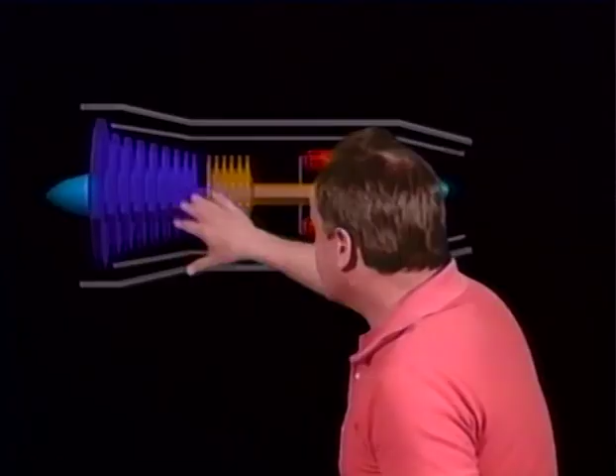Now you see this on turbojet engines and sometimes turbofan engines, and also on what they call high volume turboprops. That means turboprops that really move a high volume of air through them will have what they call two-spool or split compressors. Once again, when operated at high altitudes, the low pressure rotor, N1, will increase in speed as the compressor load decreases in the thinner air at high altitudes. And that lets the N1 seek its own speed.

So the way they put this on the test is: a low pressure compressor in a turbine engine with a dual axial compressor seeks its own best operating speed.

Now, what are the advantages? Split spool, axial flow compressors - axial flow, remember, are the ones that move the air back along the axle instead of centrifugal. So split spool, axial flow compressors offer the greatest advantages for both starting flexibility and improved high altitude performance. Those are the things you need to know about that on the test.

They also call it a dual axial flow compressor, split spool or dual axial flow compressor, and it improves the efficiency of a turbojet engine because you have higher compression ratios. Why? Because you simply have more stages of compression.

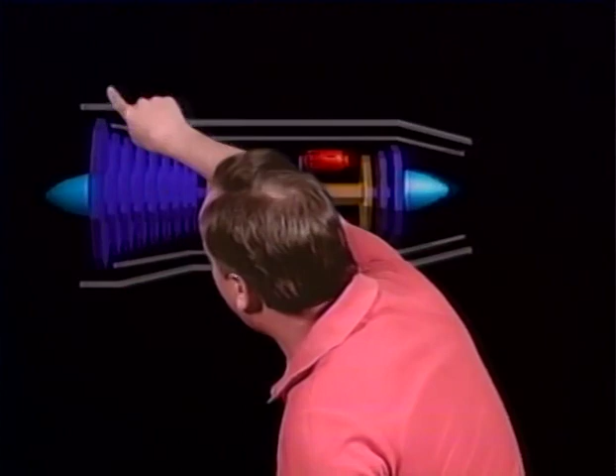All right, now they're going to ask you some more questions about it. How about: the fan rotational speed of a dual axial compressor forward fan engine is the same as the low pressure compressor? Let me translate that into English. That was an FAA test question. I'll translate it. What they're saying is, if you have a fan on this engine, it's attached to the low spool compressor, so it operates at the same speed.

So let me read it one more time. The fan rotational speed of a dual axial compressor forward fan engine - they're saying the fan speed of this engine is the same as the low pressure compressor because they're attached to each other, that's all.

What determines the compression ratio of an axial flow compressor? And the answer is the number of stages. We've already covered that. And where will the highest gas pressure in this engine occur?

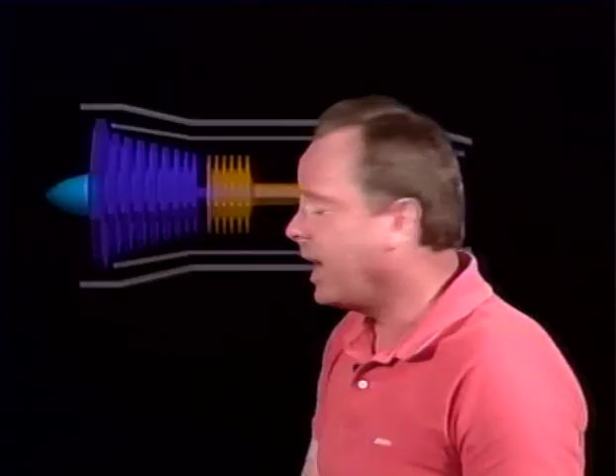Now that's almost a trick question. You would think offhand that the highest gas pressure would occur in the burner can, but that is not true. The highest gas pressure, the highest pressure in a jet engine, occurs as you come out of the last compressor stage, or as you enter the diffuser, if there's a diffuser, or as you enter the burner can. Those are all three about the same place - out of the compressor outlet, in the diffuser, or at the entry of the burner can.

Why not in the burner can? Well, the purpose of the burner can design, the aerodynamic design, is to increase the velocity of the air. The air coming out of the burner is at high velocity, and it's not at the highest pressure. The highest pressure is as the air enters the burner can. If you think about it, it has to be that way, because if you didn't have higher pressure outside the burner can, the air would not enter the burner can. So the highest pressure is at the entrance to the burner can.

Now let's take a look at the design of a turbine engine compressor blade. I want you to know that sometimes a compressor blade is known as a cutout, meaning it has a hole in it and it reduces blade tip thickness. So just as a question on the FAA written exam, the profile of a turbine engine compressor blade is a cutout that reduces blade tip thickness. That's what you needed to know.

Now let's take a close look at an axial flow compressor in a turbine engine. When you do that, you'll notice these compressor blades are airfoils, just like the wings on an airplane. And just like the wings on an airplane, they can stall, particularly when the engine's going at low RPM, there's not much ram air pressure. These compressor blades are working pretty hard and they might stall.

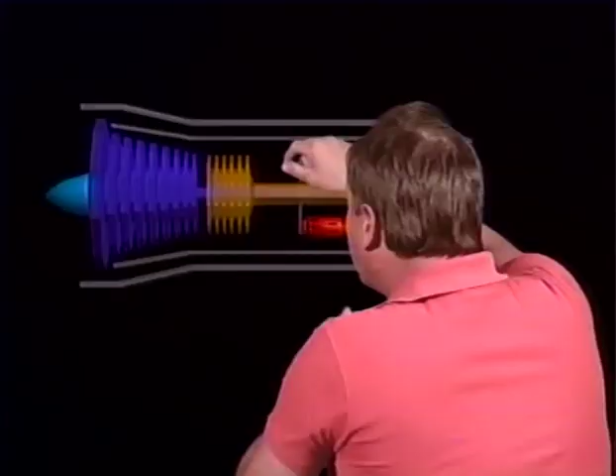Now let's take a look at our drawing of a jet engine again, at the diffuser section. We talked about it earlier. Where is the diffuser section located? It's kind of a wide spot in the duct after the compressors and before the burner can. So the diffuser section is located between the compressor section and the burner section.

What is the purpose of the diffuser section? Remember, Bernoulli's law says if you slow a fluid down, you increase the pressure. So the purpose of the diffuser section in a turbine engine is to increase pressure and reduce velocity. They're going to ask you where the pressure is greatest in a jet engine. Once again, it's the compressor outlet, or the diffuser section, that has the greatest pressures.

After the diffuser section, you have the combustion section. Where is the combustion section? We've shown it right here, these beautiful burner cans, and that provides for proper mixing of the fuel and air. The air passing through the combustion chamber of a jet engine is used to support combustion and also cool the engine, because there is more air going through the burner cans than is necessary for combustion. The rest of it is to cool the engine.

They're going to ask you where the highest gas pressure is in a turbojet engine. We already covered that - just as you leave the compressor or enter the diffuser, or at the entrance to the burner cans. All means the same thing essentially. The highest gas pressure is just before the burner cans. You could call that the diffuser section, the inlet to the burner cans, or the outlet to the compressor, but it's all the same place.

Now, the thing about a gas turbine engine is that combustion occurs at a constant pressure. So here in the burner cans, the combustion occurs at a constant pressure, and that's why they call it a Brayton cycle, or a constant pressure cycle, that the turbine engine operates on.

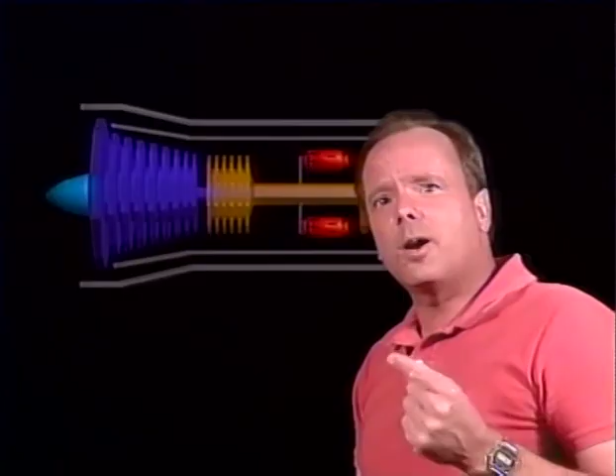They're going to ask you what types of combustion sections are found in aircraft turbine engines. We have examples right here of multiple cans - that's just little individual cans. Now, an annular section is like a donut - it's an entire donut going around the rotor here, and that's an annular section. The word annular means donut. Why they don't call it a donut section, I don't know. Another type is can-annular, cans arranged in donut fashion around the rotors. So the three types of burner cans, or combustion sections, are multiple can, annular, and can-annular.

Now let's move beyond the combustion section and go back to the turbine section. The turbines are these rotating airfoils, and the air coming out of the burner can turns these turbines. Turbines also have rotors and stators. The rotors are the rotating airfoils, and the stationary airfoils that you can't see really in this cutout very well, but they're there, are called stators - stationary airfoils that guide the air into the turbines.

So the purpose of the stators is to increase air velocity. Let's take a look - you'll notice the stators are arranged so that they get narrower, and then the air has to go through here faster. So what happens is that the stators increase the velocity. These are the stationary airfoils, and these are the rotor parts, the moving airfoils, and the stators increase the velocity of the air as it goes to the turbines.

Now the stators in the compressor section actually decrease the velocity of the air, so they're different. Here these stators are designed so that they get narrower and increase the velocity of the air. Now they sometimes call these stators, just before the turbines, a nozzle diaphragm.

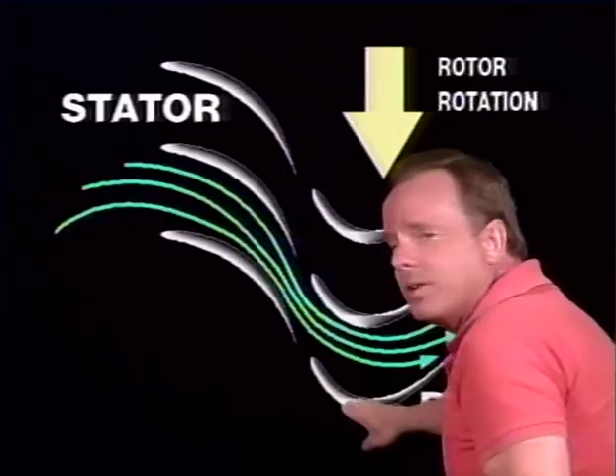There are basically two types of turbine blades or turbine buckets: reaction and impulse. If you look at this, the air hitting this would move this turbine blade just like water moves a water wheel. That is called an impulse type of turbine blade.

If, on the other hand, the airfoil shape of the turbine blade makes it move, that is called a reaction type. Turbine blades can very often be both at once - one section is an impulse blade, another section is a reaction section, and the two combined are reaction impulse blades. But those are the two principles that turbine buckets or blades work on: reaction and impulse.

So they're going to ask you, what do shrouded turbine blades do? Well, they improve airflow characteristics and they reduce vibration. That's the purpose of shrouded turbine blades.

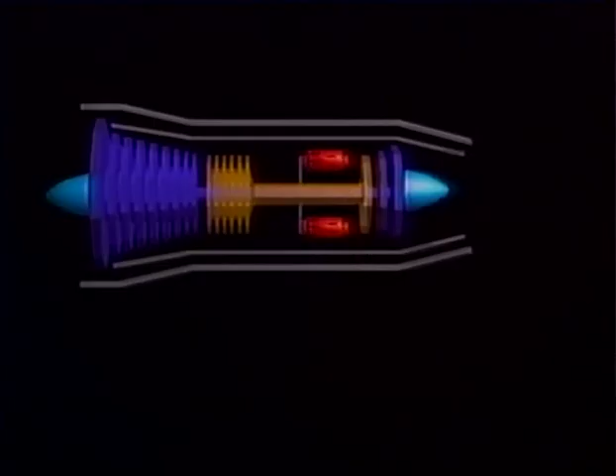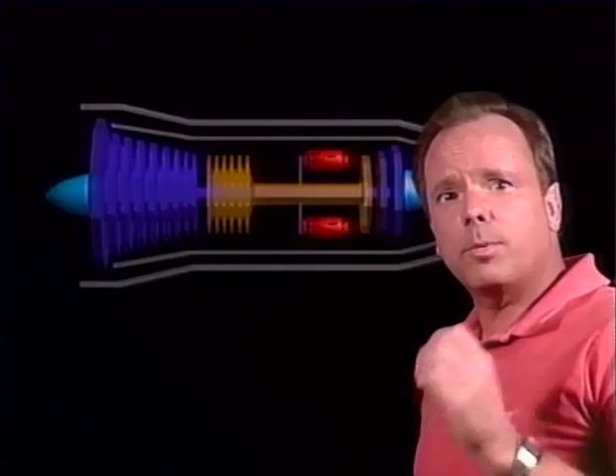Now let's take a look at our drawing of a jet engine again. They're going to ask you a question on the test - they'll say, take a look back here, and you see that there are two turbines attached to the same shaft, two turbine wheels having a single shaft. Why would you have more than one turbine wheel on the same shaft?

And the answer is to extract more power from the exhaust gases than you could with a single wheel. That's that simple right there.

They're also going to say, take a look at these turbines near the rear of a jet engine back here. What is their purpose? Why are they on this engine? The answer is the function of these turbines near the back of a jet engine is to drive the compressors up at the front of the jet engine, and that's the only reason they're there.

They're going to say, which turbine drives the N2 compressor? Now if you remember, N1 is the compressor at the very front of the engine. It's driven by the turbines at the very back of the engine - that's N1, from the very front of the engine to the back of the engine. This is the low pressure compressor, and this is the low pressure turbines.

N2 is the high pressure compressor and the high pressure turbines. So if they ask you which turbine drives the N2 compressor, it's the first stage turbine, or the high pressure turbine. This is a first stage turbine, this is a second stage turbine. So the first stage turbine drives the N2 compressor. They're going to ask you that on the test.

They'll also ask you a few things about terminology. Let's take a look at what they're going to ask you about terminology. They're going to say, what does PT7...

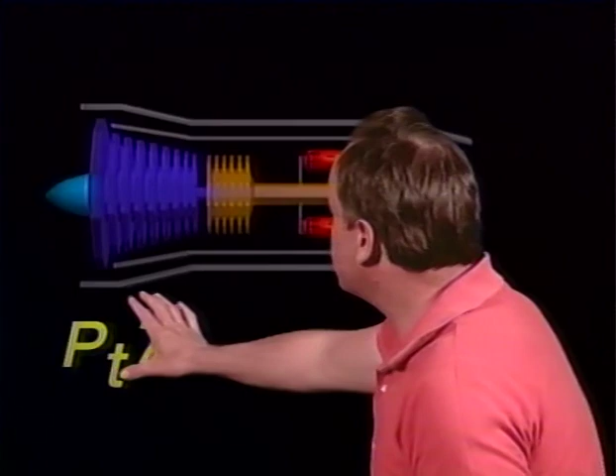PT stands for total pressure. That's total pressure at station or position 7 in the jet engine. Where is position 7? On a two-spool axial flow compressor, it's at the very rear of the engine, at the outlet, and it's the turbine discharge pressure. So PT7 means total pressure at station 7.

Where is station 7? It's turbine discharge pressure, identified in the service manuals as PT7, right at the back of the turbine engine. We talked about it earlier.

What is the ultimate limiting factor of a turbojet engine? The answer is turbine inlet temperature. That's the ultimate limiting factor, because if you could withstand higher temperatures, you could get more power and more thermal efficiency out of the engine.

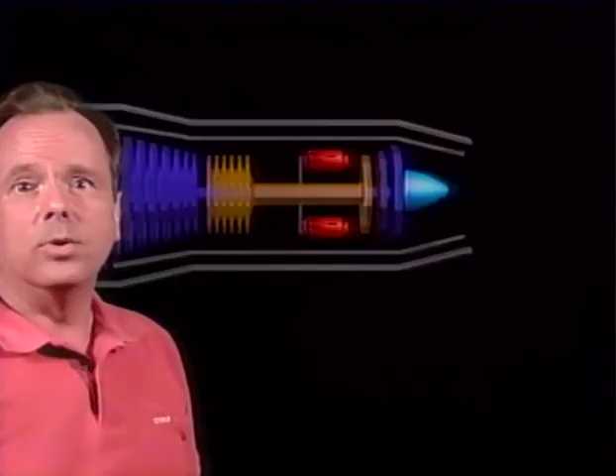Enough with the turbines. Now let's go to the very back of the engine and talk about the exhaust section of a turbine engine. What is its purpose? Its primary function is to straighten and collect exhaust gases into a solid, high-velocity exhaust jet.

Now, how do you straighten them? You don't want them swirling around, so there's a cone in the inner part of the engine, normally held by little struts, and those struts help straighten the air. So the primary function of the exhaust cone is to straighten and collect exhaust gases into a solid, high-velocity exhaust jet.

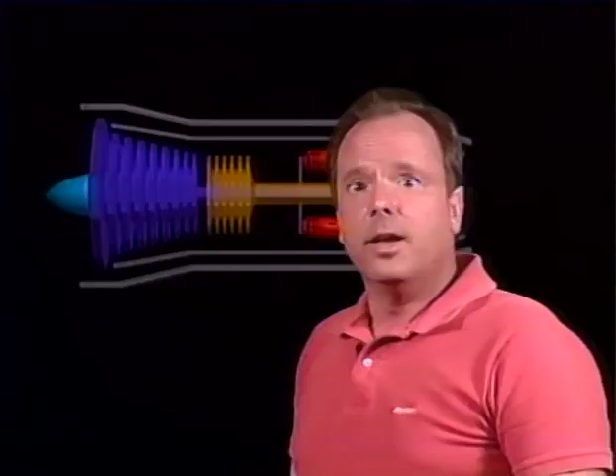The exhaust section of a turbine engine then imparts a high exit velocity to the exhaust gases, something you need to know. And where is the jet nozzle on a turbine engine located? It's located at the exhaust section of a turbojet engine.

Now let's take a look at a couple designs of exhaust sections. First, here is a convergent nozzle. The nozzle comes in and tightens up at this point, restricting the space the air flows through. A convergent nozzle, talking about subsonic air, causes subsonic air to increase in velocity. And Bernoulli's law says when something increases in velocity, the pressure decreases. So a convergent nozzle causes the air to increase in velocity and decrease in pressure.

Now let's talk about what a divergent nozzle would do with subsonic air. This is an example of a divergent nozzle, because if you look at this cone, and also at the outer part of the nozzle, the space for the air gets greater instead of less. See how it gets greater there? That's a divergent nozzle, and that causes the pressure to increase and the velocity of the air to decrease.

Again, that's Bernoulli's law. Unfortunately, Bernoulli's law kind of goes out the window when you're talking about supersonic air. We'll talk more about that later. But one more time: a convergent nozzle causes the velocity of the air to speed up and the pressure to decrease. A divergent nozzle causes the air to slow down and the pressure to increase. So what does an exhaust cone do at the aft part of a jet engine? This whole assembly will cause the pressure to increase and the velocity to decrease if it is divergent.

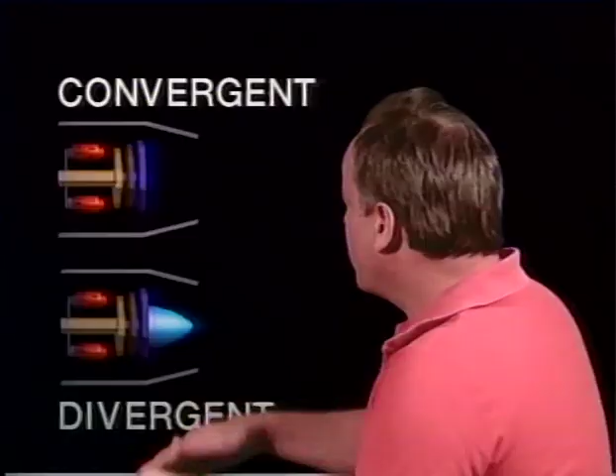Now, the last thing we need to talk about is supersonic flow of air. If you have supersonic air, that's a whole different ball game. Very often when they're talking about supersonic air, you're talking about an engine that goes supersonic. An afterburner has supersonic air very often through it, and very often has a convergent nozzle and a divergent nozzle. If you have a divergent nozzle with supersonic flow, you have to memorize this because it's different than Bernoulli's law would say: a divergent nozzle with supersonic flow causes the air to decrease in pressure and increase in velocity.

Believe it or not, we have discussed everything you need to know on the FAA written exam about turbine engine and reciprocating engine theory and construction.